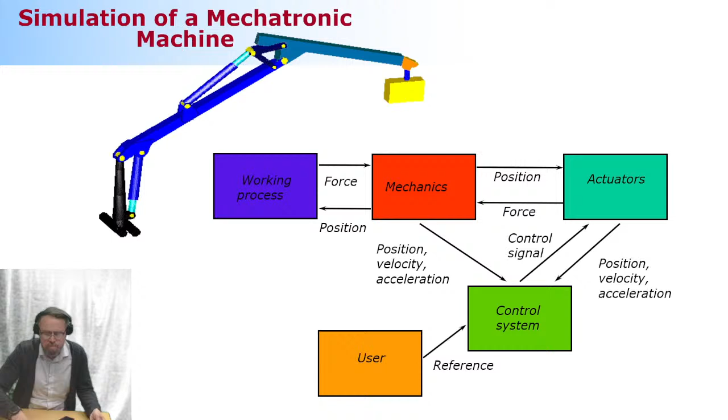Okay, so you have a phone with you. Yeah, so can you take a look how did it look? Yeah, I'm alive. That's how it looks. Yeah, it's okay. I think that it is okay. So the chroma key is not perfect, but it's not very bad either.

I think that it is. Background is like... can you hear me? Yeah. Is it okay? Still not okay, you don't hear me. Oh, okay, you do hear me now. So it's okay, it comes with a major delay. So I think that it is okay.

Okay, hey thank you, I'll be here. You're gonna be here? Yeah. Okay, so can you please use your computers to see if there's any comments from online participants? Yeah, yeah, and I'll let you know. All right, very good, very good.

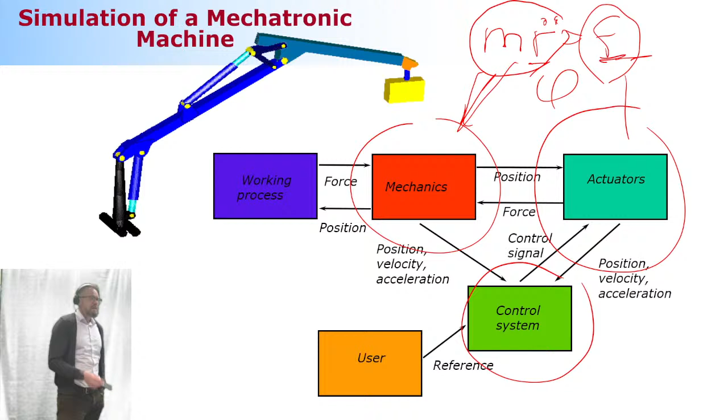And of course, it's not just these two components, but the control scheme often makes a major difference. The user can make a major difference. The control scheme is something that we don't touch much in this course. We are going to touch this one, which is the user. And the user can be accounted for when you're synchronizing the solution to real time, which is called real-time simulation. It's pretty much what we have learned so far, but the solution is synchronized to actual time. This allows you to take the user into account.

And there's something we are not going to touch in this course. It's going to be the working process or the environment. This will be left for the course that is the best course of this university.

So if you make a list of the best courses this university can offer, the list is as follows. First comes the simulation laboratory course, the one that I'm responsible for. Then comes nothing. Then there is a big gap, and slowly other courses. So it's absolutely in its own league. This course is getting started in January. Think about participating.

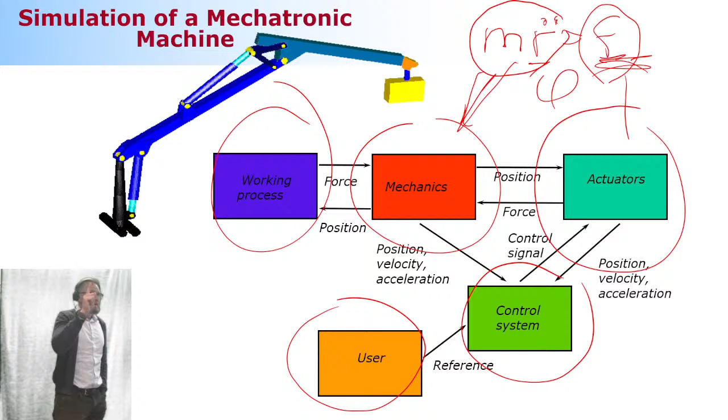All right. Anyway, contact modeling and others are going to be touched in the course that is getting started in January. But still, we are in the middle of the task. We need to start looking at this guy, and that's what the rest of the course is about. But something that is extremely important for you to understand is this.

Grading. Remember, some of you may think that I'm off the hook. I can finally breathe, I can relax because I scored well on this and this. I learned that some of you scored 5 out of 5 on the midterm exam, which is fantastic. It's really great. It's hard for me to even believe that somebody can score 5 out of 5, because the exam is really, really difficult. And now you might think, okay, I figured out everything a while ago, I can take it easy.

I don't need to work anymore. And that's where you are wrong. Because look, the grading is composed of 3 major components. Written exam, which you have not completed. You have not, because you made a first midterm exam. There's another midterm exam to come. So you need to do them both. And that's when you can say, finally, 35% of my course is done.

35%. Not much. You need to look at this weekly homework. Weekly homework is something that is continuing the second period, but only for, what is it? Is it 2 or 3 more weeks? And then we're done. Then we are not doing this weekly homework anymore. And then there's a simulation work that will be given to you. Was it this? No, it's going to be next week, if I remember correctly.

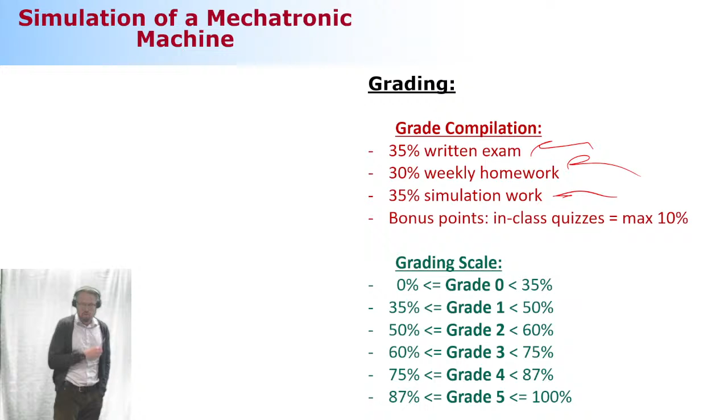Okay. All right. Any comments, questions about the midterm exam, by the way? Was it simple? Was it something that you expected to see? Was it too difficult? Nice. Nice to be back. Nice to have this, again, this nice friendly environment. This was exactly what I was missing. So the exam was lovely. So did you feel that it was difficult or it was okay? Okay. I like the way that you had two chances. Yeah, that I think is a nice thing.

The problem I need to admit is this, that it's still black and white. It's correct or not correct. That's not good. It's supposed to be like the weekly assignments, where if you're not able to answer correctly the first time, you will get a hint and your points will go down, but you're still not going all the way down to zero. Because I feel that's a little bit excessive, that if you're not able to answer correctly, then you get nothing. The one thing that makes your life a bit easier is that you have a lot of questions. So even if you missed one, you still have many to go. So, all right. Anyways, embedded techniques.

So let's discuss one more thing about mechanical modeling. And you guys, I can tell from your face, like, what? You promised no more mechanical modeling. I did, but sometimes you cannot trust me, because I have my desires to continue my stuff, because multi-body, you know how much I love that. And I'm thinking that I'm going to change my middle name to be multi-body. So it's Aki Multi-Body Mikkola. That would be more describing me than anything else. So one more effort about multi-body, and then we're going to move on to hydraulics, which is not my middle name, but I still like the modeling of hydraulic components.

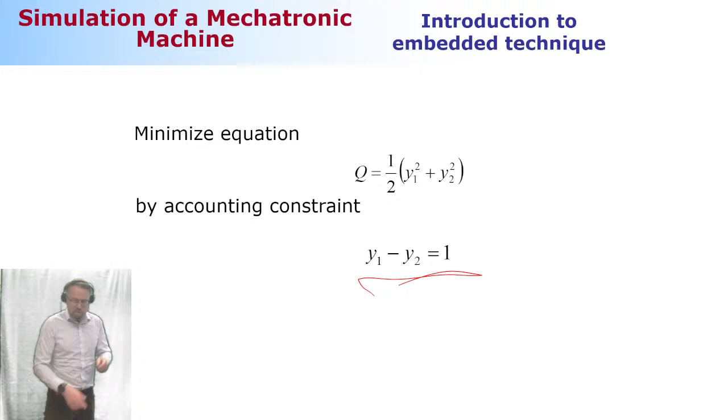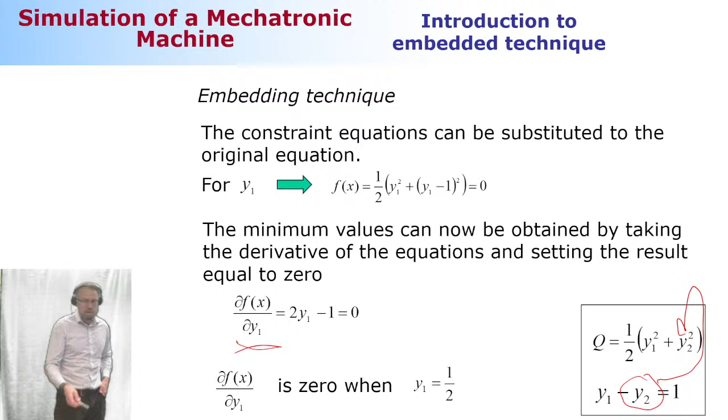Remember, 4 weeks back, we solved the problem by using substitution technique. So we substitute the constraints to original function. And it went like this. So first, you're solving your constraints. From your constraint, you're solving y2. Once you're done with that, you substitute y2 to your original equation. And then you differentiate the equation with respect to the only variable you have, which of course, in this case, is y1. You set this to be equal to 0, and you're able to solve your first variable, which is going to be y1. So it's simple like this.

You redo the thing, but this time you're solving the y1, and you substitute it, you substituted that here, and then you can solve the y2 by differentiating everything with respect to the variable, the only one you have in your system. And then you're able to solve another equation.

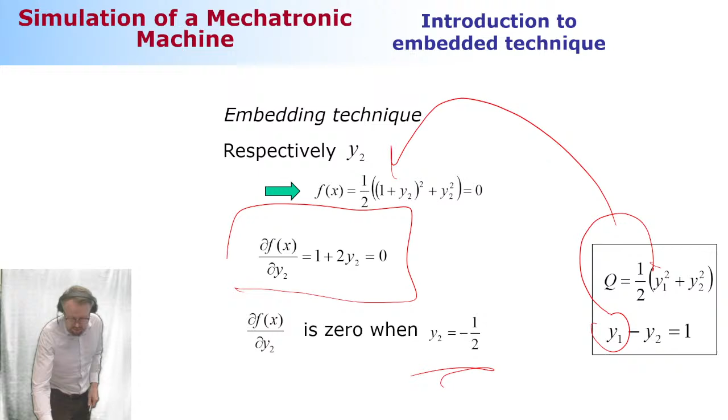How you do the same, but in mechanics, it goes like this. We take ourselves back to the equation of motion, and we take ourselves back to where we said this virtual work. This was the equation we end up to be. Remember, so we say that virtual displacement of all the coordinates multiplied by generalized inertia forces minus generalized externally applied forces is something.

Unclear what it is. And I said that the concept of virtual work is often misused because in general case, as this virtual displacement goes in all possible directions, it is not equal to zero because the constraints are not obeyed. You're going against the constraint. That's clear because if you have, let's say, a pendulum like this, you're moving the pendulum to x direction, it's going to be like this. So you're breaking your system, and that's why the constraints are actually working.

The only way to set this to be equal to zero is to set this virtual displacement, which is this guy, such the way that it is kinematically possible, kinematically admissible. Okay. Now, pendulum is clear. Kinematically admissible is this. That makes sense.

What if you have more complicated mechanisms? A 4-bar mechanism, it is not so simple to define what is a motion that all the constraints are fulfilled. Crankshaft mechanism, seemingly simple mechanism, but it's not so simple to say, okay, what kind of displacement exactly is the displacement that is kinematically possible, displacement that fulfills the constraints. We all understand how they look in real life, but how is it you can express that mathematically? That's a challenge. And there is a way to make it happen.

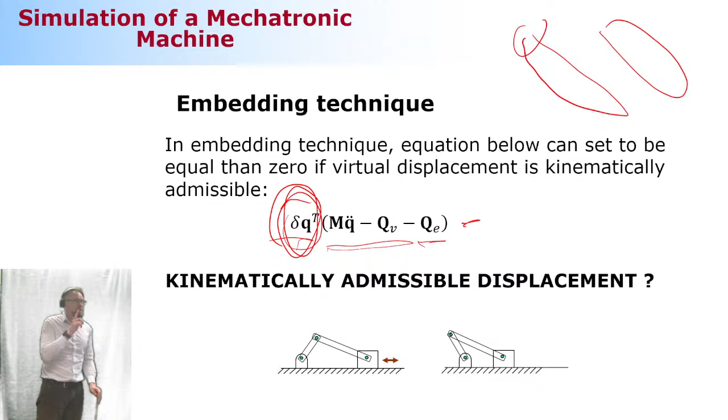And the way you can make it happen is that you can categorize your coordinates to 2 different categories. And these categories are dependent coordinates and independent coordinates. How you do that? Actually, you can do this almost any way you want. There's going to be certain limitations, which I'm going to explain to you momentarily. But basically, theoretically, you can do this categorization as you want. All that matters here is that you need to make sure that the number of independent coordinates must be equal to the number of degrees of freedom. So that's the only thing that matters.

The rest are going to be dependent. Why is it like that? It's going to be like that because if I have a 1 degree of freedom system and I'm moving this 1 degree of freedom, I can select any coordinate I want, but the rest of the coordinates are no longer able to move as they want, but they have to move according to constraints. So this is where that is coming from.

Yes, sir. Yes, because I was looking at your faces and I see that some of you are mentally screaming like, oh my God, I will not survive anymore, this is too much. First promise that it's going to be sun shining and everything, long daylight and beach weather like this. You can look outside, there's nothing but like that.

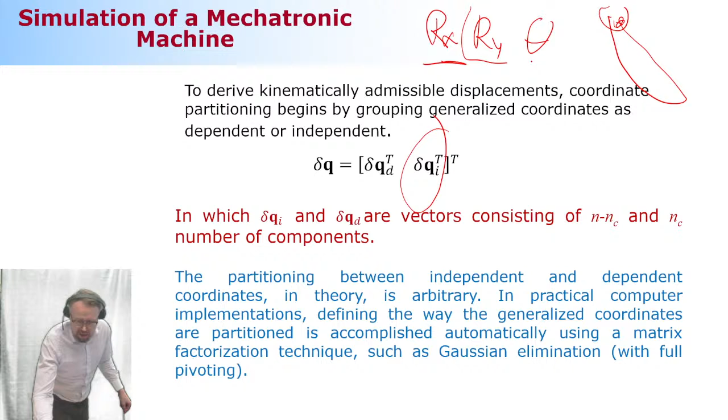Whatever you want. If you want, you can select this one to be the one that is freely movable. But the rest are no longer free to move as they want, but they have to move according to the revolute joint here. Or if you say, actually, I'm not happy about that selection, I want angle theta to be the independent one, fine. But the rest need to be solved by using constraints. And when you do so, then you can say that the displacement is kinematically possible, kinematically admissible.

Then the motion is for sure something that the system can do, because all the dependent coordinates are solved using constraints. That's what we're going to do. And this is the method that is called the embedding technique, where the constraints are embedded inside of the equation of motion. I said that dependent coordinates need to be solved using constraints. Where are the constraints? They are not here. So what was the representation of constraints? Jacobian matrix. That is the one that is telling the constraints.

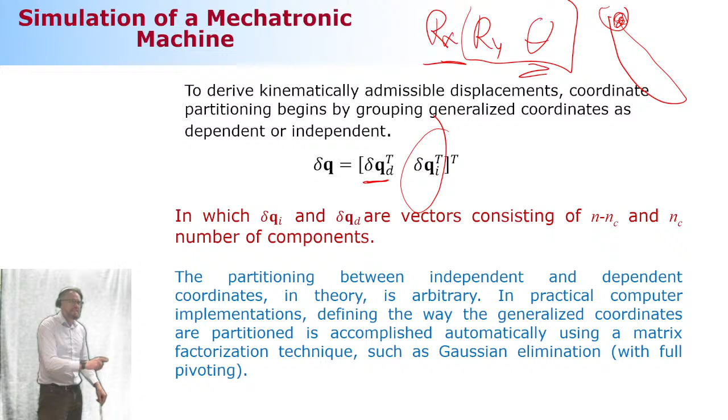So, okay, what about we do this? Oh, there's an in-class quiz. Let me get back to this in-class quiz momentarily, because I was about to explain where the constraints are. The constraints are the Jacobian matrix. So what we need to do here is break the Jacobian matrix in a way that there is a part related to the dependent part and an independent part. This division, theoretically, you can do as you want, but theoretically only. In real life, this division will be based on Gaussian elimination with full pivoting. This is how the selection is made automatically for you.

Okay, if you apply this coordinate partitioning to the Jacobian matrix, and you have a Jacobian matrix, like in the case of the pendulum, consisting of 2 rows and 3 columns, now you can select 2 of these columns to be associated with the dependent ones. If you select these 2, it's going to be a 2 by 2 matrix. And what is left is going to be a vector with 2 components. And because the one related to the dependent part is probably going to be invertible, now you have a relation between the independent coordinates and all the coordinates. And this is what makes it possible to express the motion in such a way that the constraints are not violated.

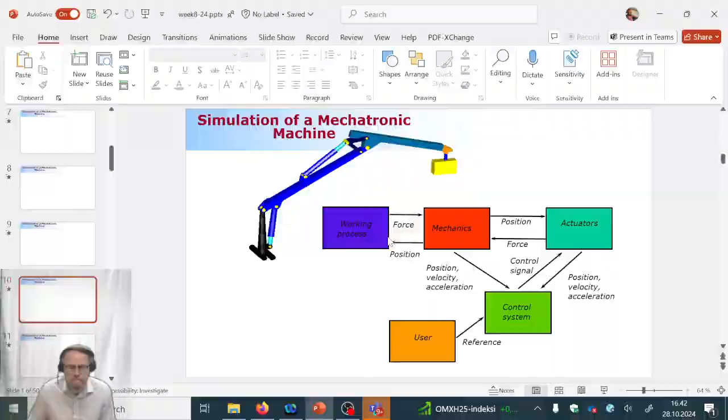This one. Oh, you guys don't see this. Or should I think maybe I should leave this for a little while and get back to this after a certain time, because what makes me feel very, very happy is to get 100 and something answers. So right now we're below 100.

And why is this important? Because there's only one clear indication of how you do in this class. And that clear indication: if you follow the lectures, you're going to do fine. And if not, you will not survive.

You will not. Okay, we got 100, but I need more than 100. Okay, 101. Okay, that's okay. I feel semi-happy, not fully happy, because remember what was it before the midterm exam? It was 128, roughly that much. 104 answers. Okay, let me leave this up for a while and revisit that momentarily. Okay?

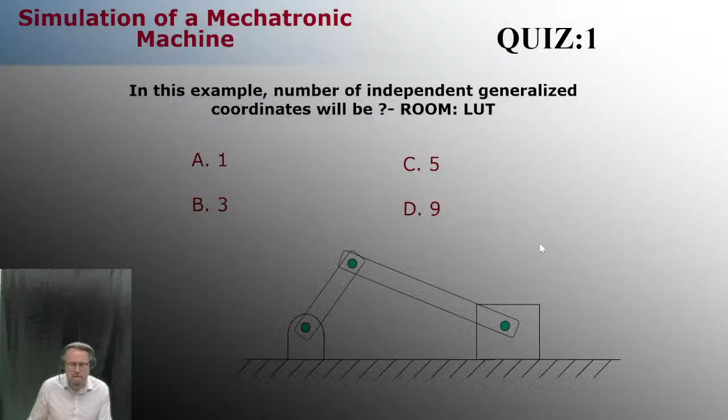Here, we continue this story. What follows is that I'm going to speed up a little bit, because I would like you to just understand this concept of coordinate partitioning. The rest is mechanical, and you shouldn't get confused. The coordinate partitioning is what I just said, that you're dividing your coordinates into dependent and independent. You can do the selection almost as you want. The only thing that matters is that the number of dependent coordinates must be equal to the number of constraints, and the number of independent coordinates needs to be equal to the number of degrees of freedom.

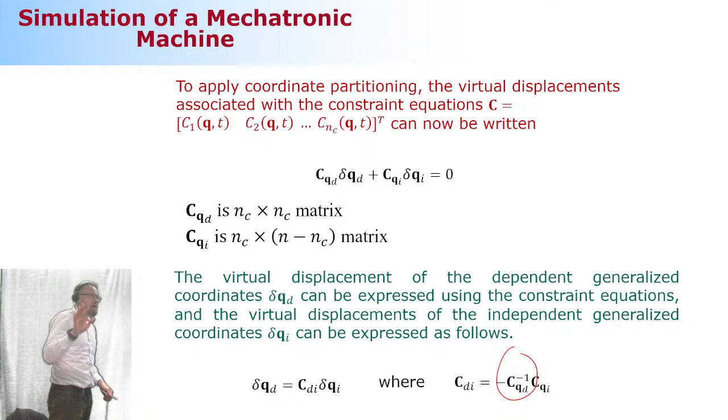Almost as you want. There's only one limitation, because you need to invert the dependent part. So it needs to be a positive definite part, and to guarantee that, you need to use Gaussian elimination with full pivoting. But don't worry about that. You don't need to think about anything that complicated. Right now, it's enough to know that you do this division, and that's all you need to do.

All right, now let's continue the story. This virtual displacement of all the generalized coordinates can be expressed by independent coordinates, which is the number of degrees of freedom. Can you now see the beauty? When we do this substitution, something magical happens: this part of the equation of motion can be set equal to 0. Why? Because now the virtual displacement is kinematically possible. We are not violating the constraint. And this works no matter how complicated your system is.

Why? Because this relation is coming from the Jacobian, and the Jacobian is coming from the constraints. So we are obeying the constraint. Beautiful. So now we can get differential equations based on the number of degrees of freedom. How many differential equations? Exactly the number of degrees of freedom. Remember, a little while ago, I think we looked at the 4-bar mechanism.

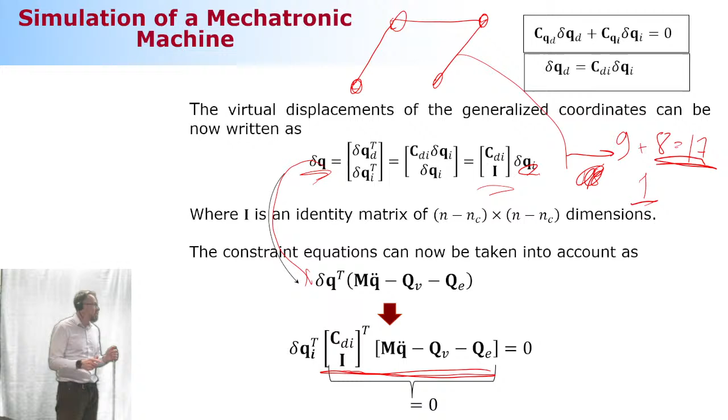So this is the story. Now we have these two methods: one based on minimum number of differential equations, embedded equations, where we substitute the constraint inside, or augmented formulation where we even take the reaction forces into account. The problem, of course, is that reaction forces are not automatically solved, but you can solve them as a post-processing technique if that's what you're interested in.

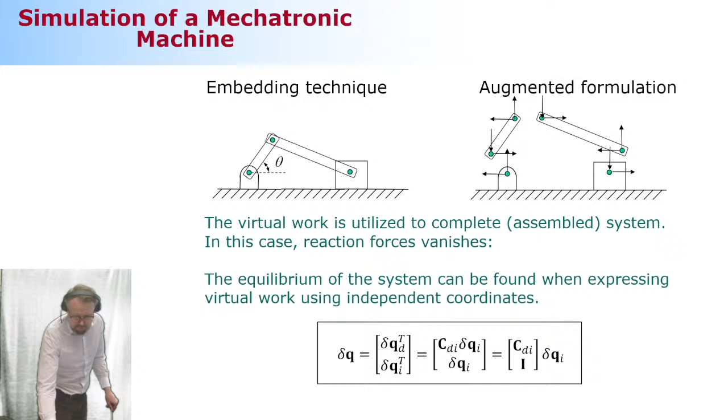All right, so we were here. This was a trick that we did. Let's practice this a little bit and let's summarize it.

So now the concept of virtual work goes like this: you have force multiplied by displacement, virtual displacement. Then you express this with the help of the variables you're dealing with, generalized coordinates. You can express this with a mapping matrix. And when you're using coordinate partitioning in your constraints, you can express your virtual displacement such that it is kinematically admissible.

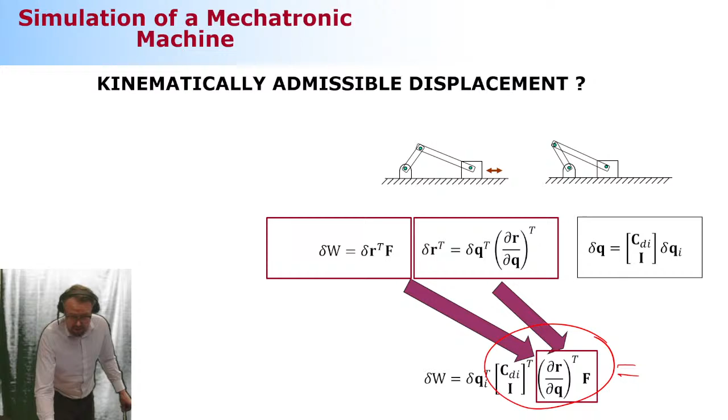Now, when you do all these substitutions, you can finally set this part of the statics to be equal to 0. This is a static example because inertial forces are not accounted for here. And here's an example for you. So let's look at this example, wrap up the case, and move on to hydraulics.

All right, so I have here the mechanism that we have studied before. This is the simple 1 degree of freedom system where there is a primitive joint located here. This point can slide along the global y-axis, and this motion is okay. And this motion can slide along the global x-axis direction. So those are the two constraints, two primitive joints. One moving body, so it's going to be a total of 3 generalized coordinates.

Okay, 3 generalized coordinates are the ones denoted here. Now I'm making an obvious choice here: I'm selecting the angle theta to be my independent coordinate. But if you're not happy with this selection, you can select something else. This selection is very clever because once you compute your Jacobian, it looks like this.

Now what you need to do is break this Jacobian into 2 corresponding parts. The first part is associated with dependent coordinates. The rest is independent. This guy, which is the identity matrix, is going to be the one related to dependent coordinates. This is a good choice because later I need to invert it, and inverting the identity matrix is a super pleasant thing to do. So it's going to be identity matrix, so that's what it is.

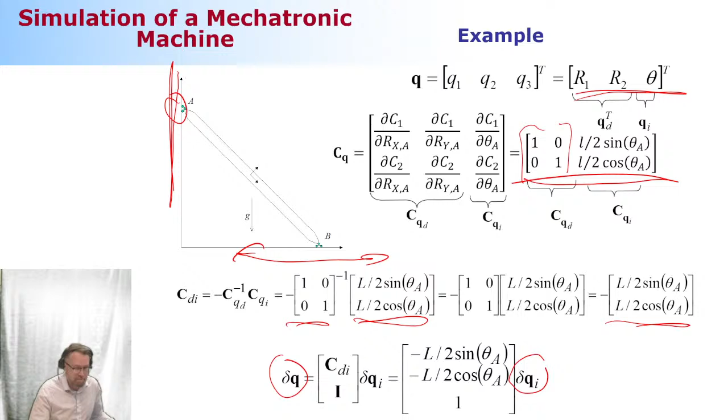Okay, now the rest is this one. And now you can find this relation between all the coordinates and the independent coordinates. Okay, so that's step number 1.

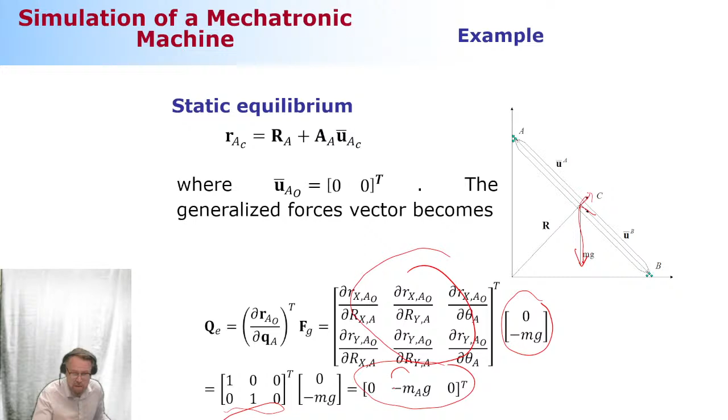Then, where the force is applying - now I have the gravity force only applying in the system. It's applying here where this center of the body reference coordinate system is located. So the mapping matrix that maps the force from global to generalized coordinates is going to be very, very simple. Generalized external applied forces consist of 3 components. The only non-zero component is the one pointing in the global minus y direction. And when I'm using this chain here, this is how I can express my equilibrium.

When I do so, this is my force, this is my mapping. When I multiply them together, as shown here, I'm going to get the equilibrium. An equilibrium - this is where I can solve the angle. And the angle shows me if it's pointing like this, this is where the static equilibrium can be found. Simple demonstration of what the embedding technique can do for you.

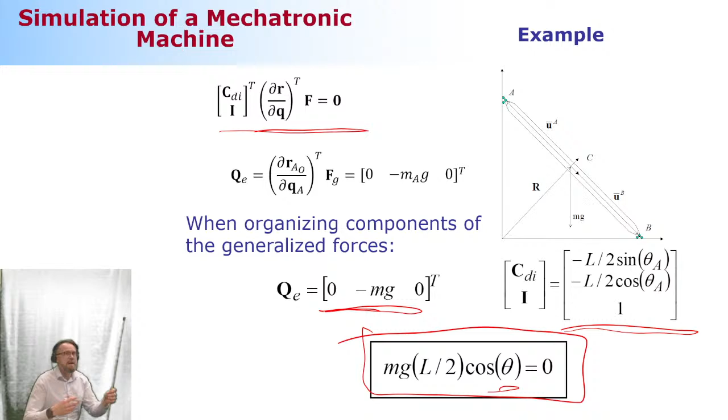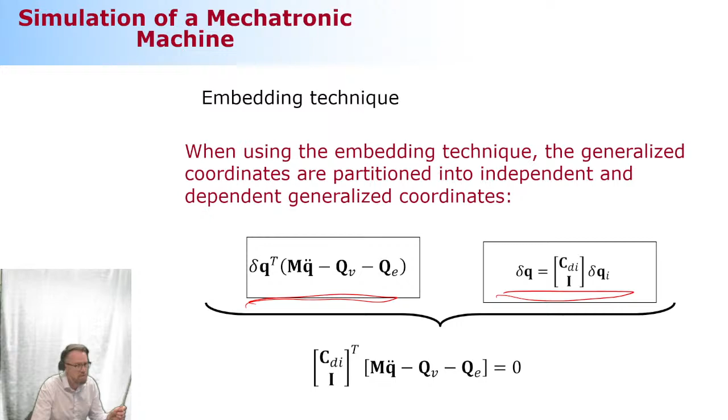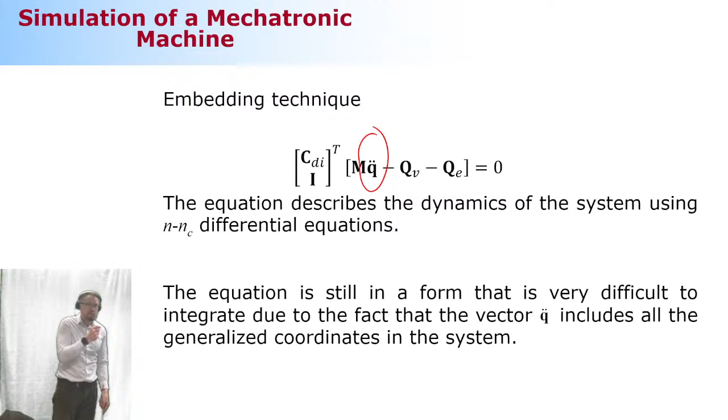And now we're going to leave that. Embedding technique - this is where we started. This was the one based on coordinate partitioning. And one more problem: in a dynamic case, we still have one annoying problem. This guy, because that includes all the coordinates, and we don't like it because we would like to express the acceleration too, based on independent coordinates. So that too is something where we need to use coordinate partitioning finally, and then we're able to express the equation of motion in a proper way.

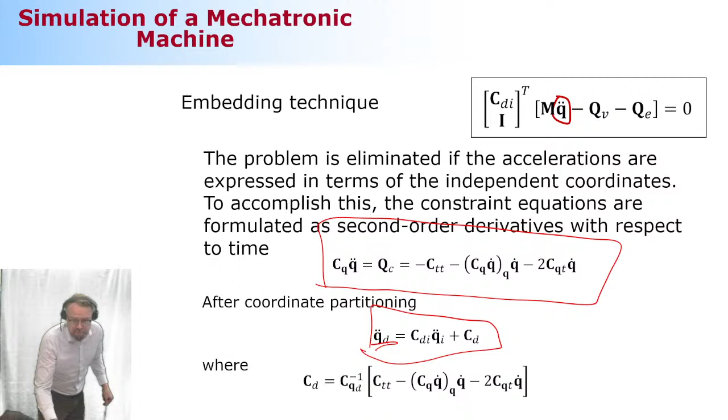So when you're expressing this acceleration, and using coordinate partitioning, in this particular case, the one related to dependent acceleration is going to be expressed like this, and the independent is like identity. So now, using this relation - sorry that I'm going fast, but this is mechanical, so you guys don't need to worry about the mathematical details - when I use this substitution, the equation of motion is here. That's how it looks.

Now what I'm going to do is this: we're going to take a look at the in-class quiz. So we will have another in-class quiz. And then we're going to look at one simple example about the embedding technique, but we're going to go through that fast, because this is not the core material anymore. And then comes the hydraulics. How does that sound, like a plan?

What did you guys make during the exam week? I feel some certain level of unhappiness. What went wrong? Was the exam too hard, or what? It's just that life is rough. Is that the explanation? That's good, because remember, everything that comes without pain has no value. This course is definitely something you feel the pain for, physical pain. So it comes with the game.

Can you feel that your brain is getting bigger all the time? Of course it hurts, because your brain is getting bigger, so it's not easy. It needs to hurt, physical pain. But it's going to be something you're happy about afterward. When you look back, you can make one of these survival t-shirts: Survive Simulation of Mechatronic Machine class. Okay, let me take myself to the in-class quiz.

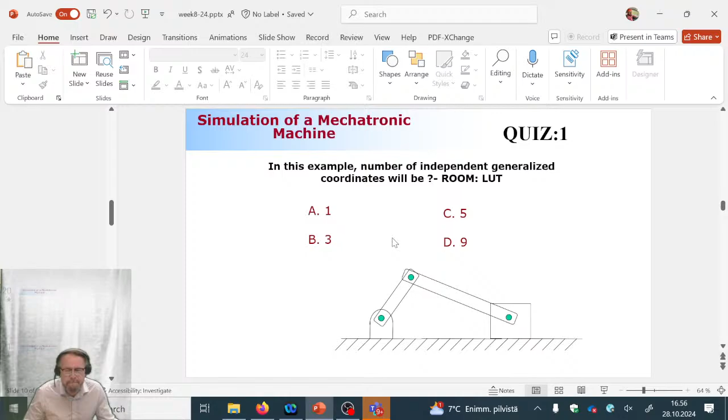Oh my God, I'm smiling. I'm smiling, and I can tell you why. Not because of the success rate, no, that's not the reason. But the reason for smiling is this: number of participants is 127. Fantastic.

What is wrong with this guy? Why does it keep bouncing? Now it doesn't really matter what the success rate is, even if it's 0, I'm going to be happy. Rest of the week, I'm going to be happy. But if it's higher than that, that would be even better. But that doesn't really matter.

Results, what is the success rate? 90... 72, no, 72. Ooh, 95. Oh my God, I'm really playing with fire. This is a high-risk game. But we're almost done with this high-risk business, because there's going to be one more simple in-class quiz, and the rest is so difficult that you guys have no way to answer correctly. No way.

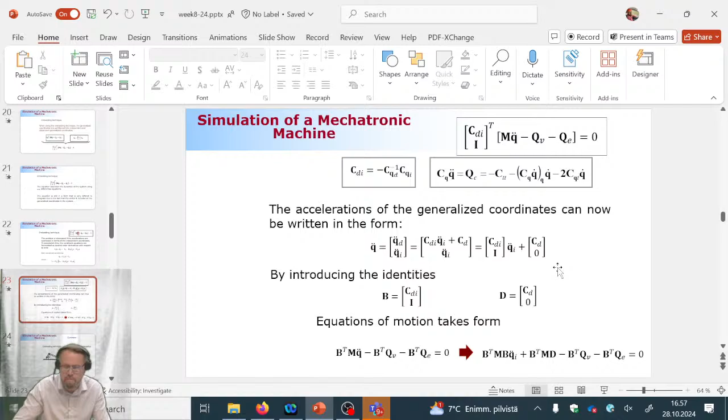Okay, let me take myself back. Not this one, but... okay, so the same example.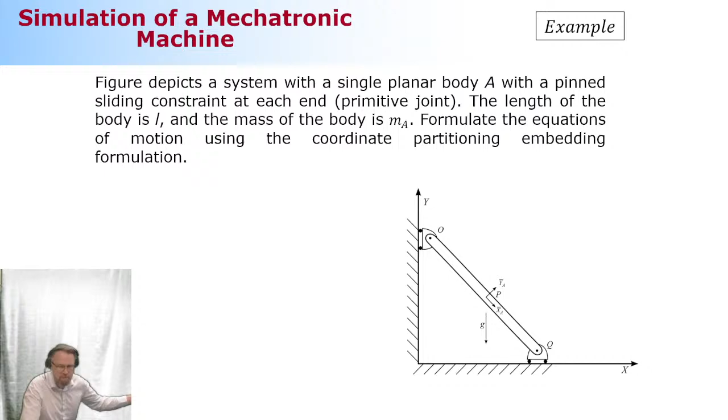The one we looked at for static equilibrium, I'm going to solve this using the embedded technique, the substitution technique. We have another set of steps to take, and then we're going to get the equation of motion automatically. But first is this: in this example, the number of unknowns.

Number of unknowns, number of unknowns. Most of the class is voting for 5. Think about it: the number of unknowns is going to be based on the number of what? Is it going to be the number of generalized coordinates? Is it the number of constraint equations? Is it the number of generalized coordinates plus constraint equations? Is it based on the number of degrees of freedom? Is it going to be like this?

Which one is it? It will not help you, definitely not help you. But what do you guys think? Okay, the class is saying here. Most of you are saying that it's a number of... like you're saying it's this one.

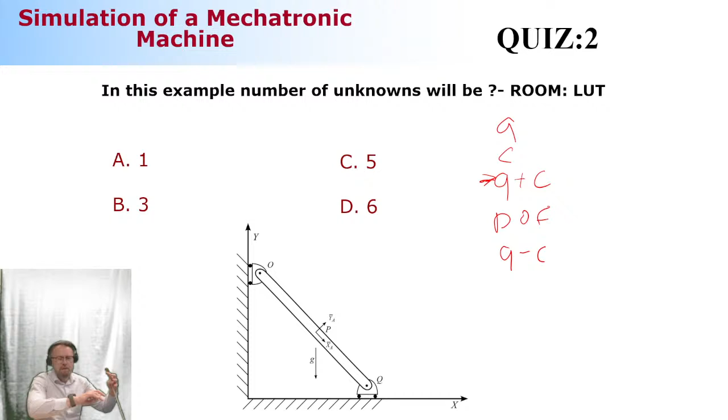Now, based on your face, you seem to have full confidence that it's absolutely correct. Okay, we're going to revisit this right after I explain this example. Here's my proposal to you: let's look at the example, then we're going to go back to the in-class quiz. And then what? Break, if you can still find your way out of this lecture room. And then we're going to come back and get started with the hydraulics.

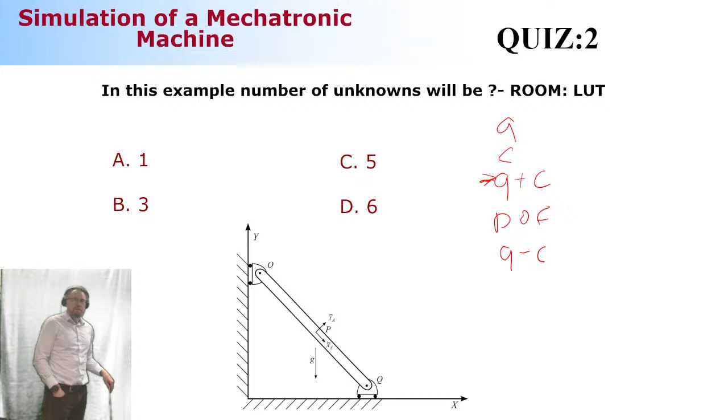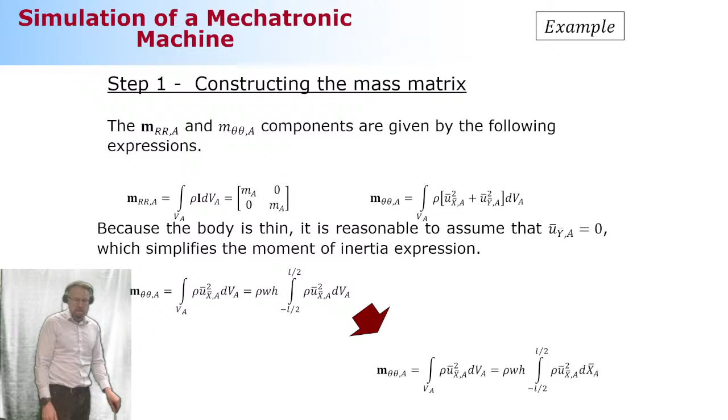Good deal. All right, so step number 1, mass matrix. No difference. We still need to compose the same components that we did when we used the method based on Lagrange multipliers. The difference is in the assembly process, because the assembly process will be different in this case. So there's nothing new to learn from this first step. The mass matrix will be a 3 by 3 diagonal matrix, because the body reference coordinate system is located at the center of the mass.

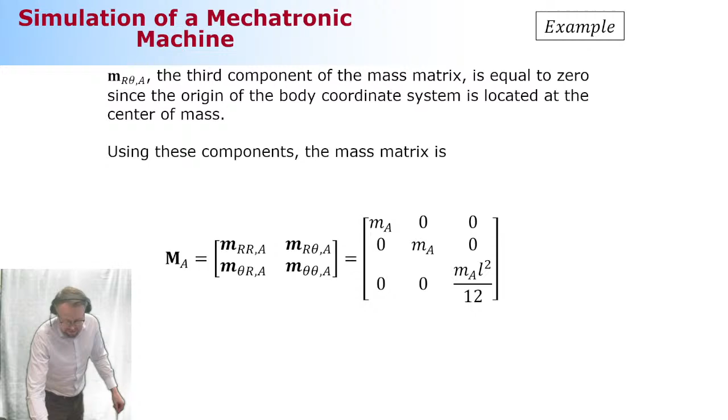We learned this already when we were a little bit younger than today. Then the generalized external applied force is no different in this regard either, so it's all the same business. We learned this in the case of static example 2.

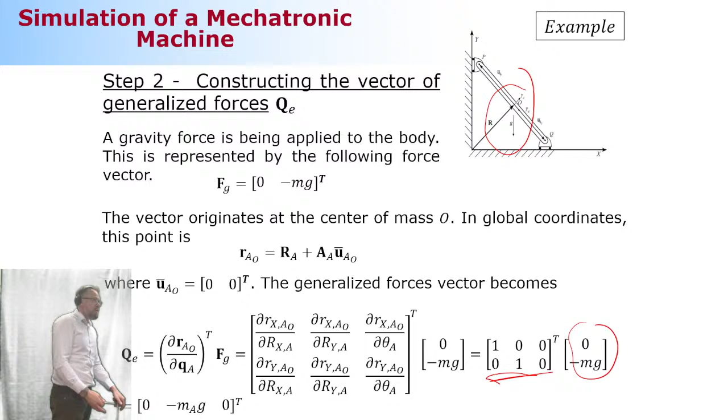This is the mapping matrix, which isn't even needed because the force is applying at the center of the body reference coordinate system. The force vector consists of 2 components: 0 and minus mass multiplied by gravity constant. The quadratic velocity vector is going to equal 0, because we learned that's the case when the body reference coordinate system is located at the center of mass.

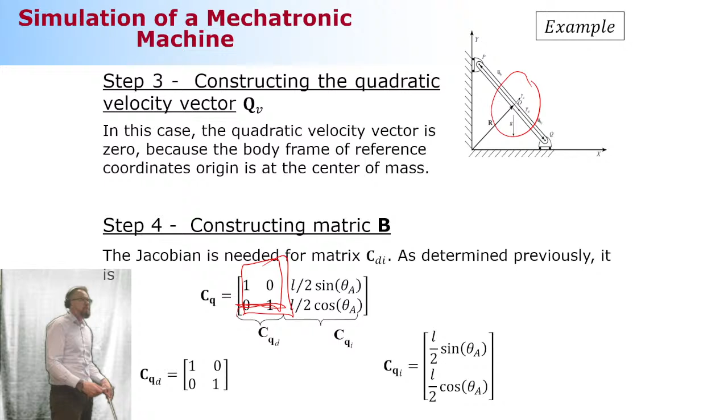Here comes the first complicated component, because now we need to use coordinate partitioning. I'm selecting the identity part of my Jacobian to be the dependent part, and the rest is going to be independent. When expressing B, this identity part needs to be inverted, and that's going to be my B matrix.

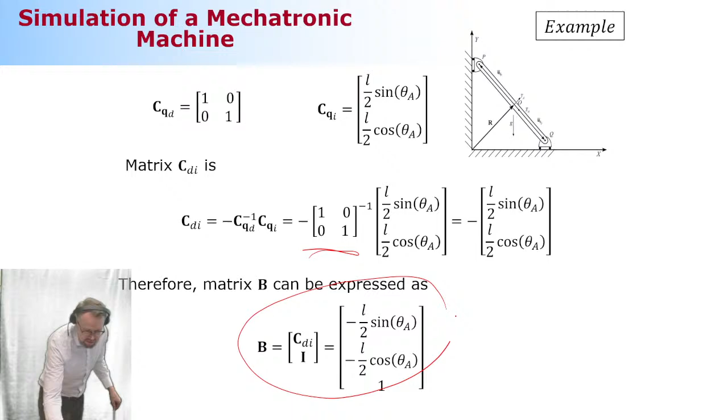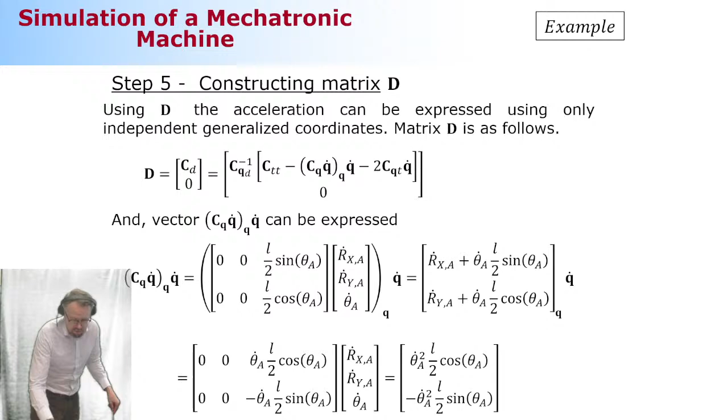My D matrix is the next step. I need to use coordinate partitioning at the acceleration level, and yes, this is a big pain. This is not going to be pleasant to do, but thank God we have symbolic math tools so they will do the trick for us. Once you do this, finally this is the D matrix. I'm not even looking at the details, but the D matrix looks like this.

In the final assembly process here, I have not made the mathematics, but look at the number of unknowns—it is equal to the number of degrees of freedom, which is 1.

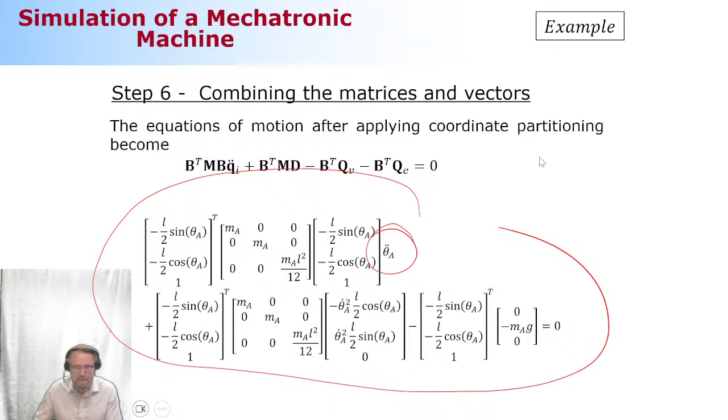Okay, let me take myself back. I need to rush myself, otherwise I cannot say the correct answer. Oh, you cannot. Oh yeah, yeah, of course not. Okay, but again, I cannot say what is the correct number of unknowns. But in this example, the number of unknowns will be...

I'm not going to say that, because as you know, in the class we have roughly 20 to 40 students. The majority of the students are participating online, and I don't want to help them too much.

By the way, guys, why are you coming here? Why don't you follow the lecture online? Online is artificial. I know the big problem with online is that you get distracted so easily—let me check my email, let me check my YouTube, let me check my Discovery Channel, let me check this and that. All of a sudden you recognize, oh, it's all gone, the lecture is gone, and I did not even notice it started. This happens so easily. Here you now have no other choice than to listen to me, and I make all the fun out of that.

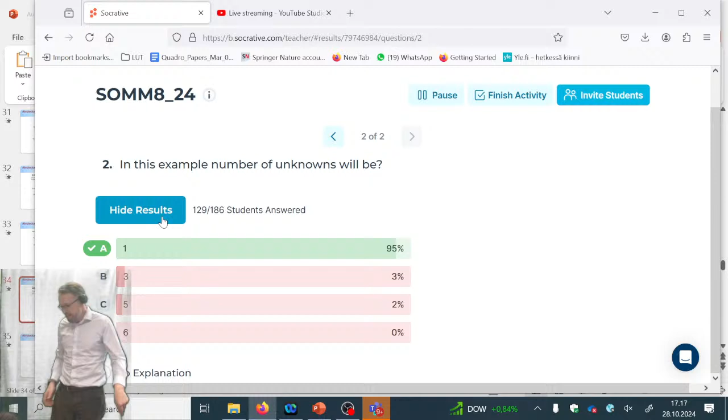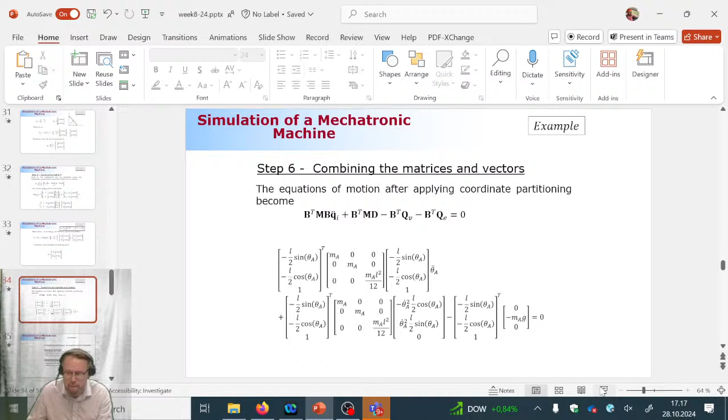Let me take myself to hydraulics. I need to take this. Oh, no, not this. Because there's a certain sequence that I need to follow, otherwise it's not displaying well. Okay, now it's displaying well.

Okay, embedded technique versus augmented formulation. Embedded technique: number of equations are based on coordinate partitioning. That's the trick we did. And equations of motion do not include the reaction forces, and very few equations are needed. Large number of equations of motion are relatively simple to deal with. Reaction forces, look at that, are included in the equation of motion. Okay, mechanical modeling. We need to revisit this as soon as I give you this simulation assignment.

But you see something important here. This is all about thinking, and not about doing. There's one famous student that got the degree a while ago. When he was modeling, the clicking frequency of his mouse was more than 100 hertz. So he was really clicking like hell, but success rate was very, very low. So that's a good example of too much doing, too little thinking. So make sure you're doing the opposite. Think more than do. But we need to revisit this list a little later.

Okay. So how was it last time, when we started the lecture, there was something with the display? Okay, I think it is okay. Now I made the incorrect sequence again. Okay, how is it looking? Is it getting back? We can see it. So you can see it now.

Okay, so in heavy machinery, the typical way to use hydraulics is that there is a diesel engine connected to a pump. The pump is producing the energy for the hydraulic cylinders, and this is the way you do the actions in heavy mobile machinery. Now there is a heavy trend, which is electrifying: try to use electric drives more. And electric drives are a good idea. The problem is that the power density, I mean physical size of the actuator versus the force it can produce, is not as good as in hydraulics. In hydraulics the power density is superior; with small dimensions you can produce a lot of force,

which makes it very, very good in heavy machinery. Now every now and then there have been different ideas, like how to take actuators to another level or how to create another type of actuator. A good example that was a little bit in fashion a while ago was water hydraulics. So instead of using oil, let's use water, because then it doesn't really matter if there's leakage. If the water comes out, fine, you can drink it if nothing else. So it's not going to be anything too dangerous, environmentally very friendly, green even. The problem, of course, is this: two big problems.

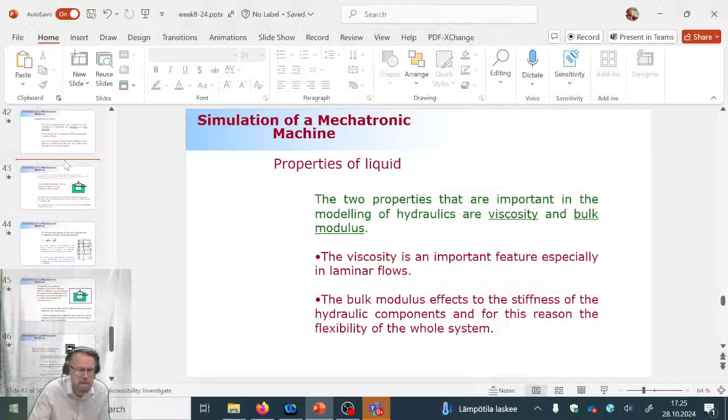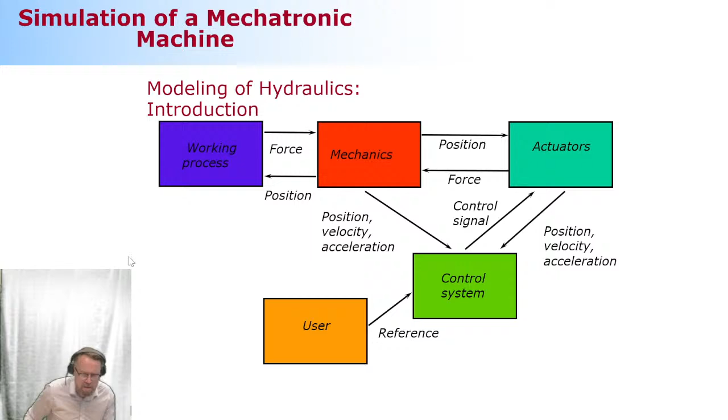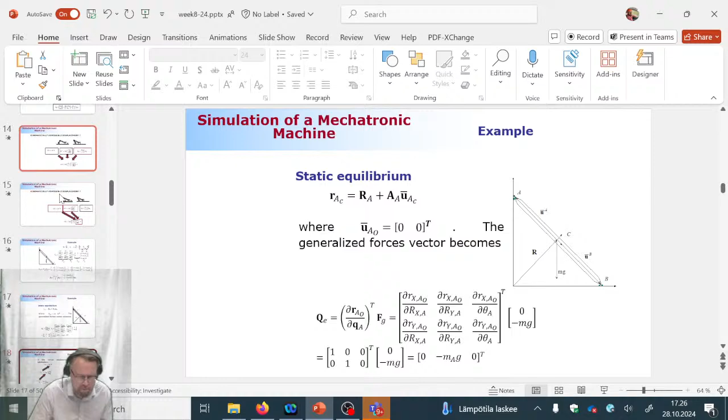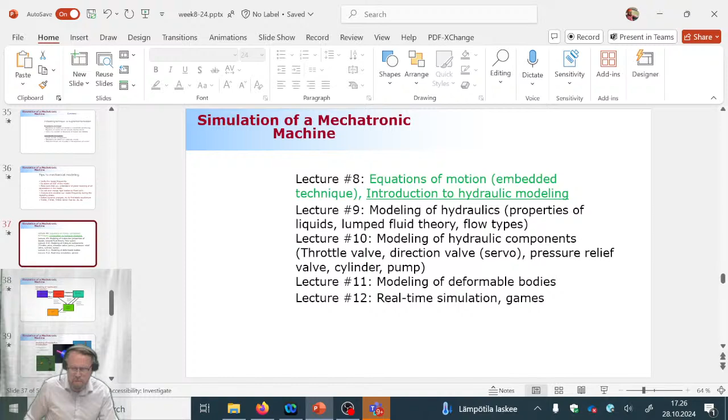All right, so, actuators. This guy is stuck. So what is up with this? This is completely dead. Am I still streaming? Even the mouse is no longer working. I need to take myself back to where I was. No, I don't get this thing. How come this is not willing to collaborate with me today? Nothing. It keeps taking me to this weird place. Okay, now my keyboard is working. I was here. If I put this in presentation mode, then you can see it. Yep, now it works.

Okay, a few examples where hydraulics is being used. The animations are not displaying well, but of course, different kinds of crane structures. This is a typical example where you can make use of the high power density of hydraulics. You see that the size of the actuators is not huge, so they are pretty lightweight, which makes them optimal for different kinds of crane structures. This is a pile driver. Again, the animations are not working well, but finally it's coming. The controlling of this big boom is made by hydraulics.

This is a deflection compensated roll, which is used in the paper making process. This is a type of roll that I'm specialized in. Seriously, it is. It works in a way that there is a shaft that is standing still, and then there's a shell that is rotating, and between the shaft and the shell there are hydrostatic bearings, very specialized because they can introduce forces to compensate the deflection. That's where the name deflection compensated roll is coming from. It's typically used in paper making processes, in the post processing part, and even in part of the machine itself.

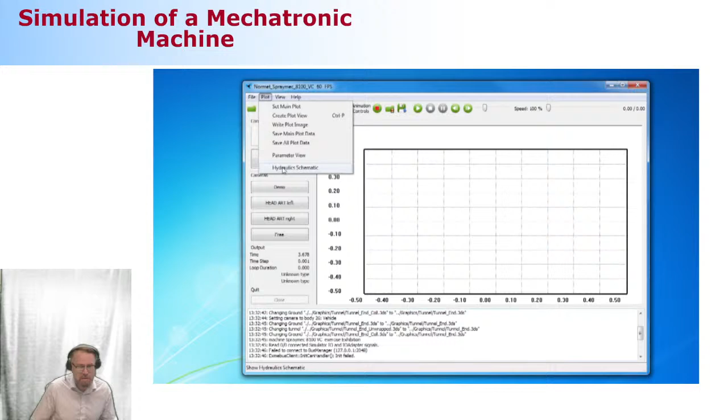All right, and how did I specialize in that? Because I was a product development engineer more than 25 years ago in a company called Valmet, making these paper making machines. Okay, here is an example of hydraulic modeling, which I'm not going to use, because this kind of hydraulic modeling is based on these kinds of icons.

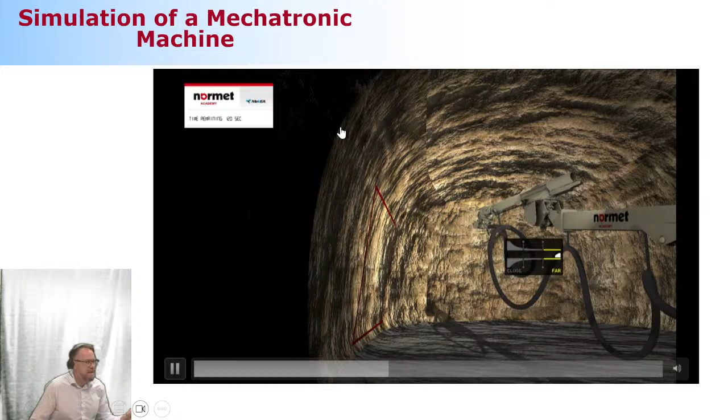You just put these icons in your screen, and then you go. We are not going to use this, but instead, we're going to enjoy the life more. And the way we're going to enjoy the life more is that we're going to create the equations that are behind these icons. This is going to be the way we're going to model the hydraulics. And yes, you're right. It's going to be a big pain because one single mistake in one of your equations means it's nowhere near to work properly.

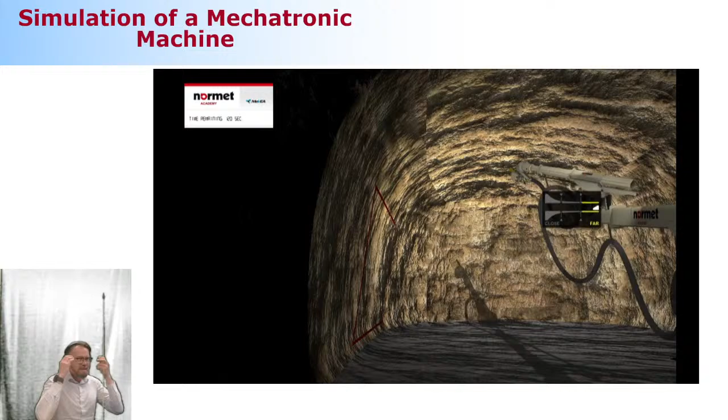But educationally, best, because can you feel this? Can you feel this noise? It's coming when your brains are getting bigger all the time. They definitely will do so when you're going to use this kind of manual modeling procedure. But manual modeling procedure is not used in real life.

In real life, when you're making models, you're using one of these tools, and there are plenty of different kinds of tools. You just place in the icons, you're selecting proper parameters, you're connecting the components together, you're good to go. This is a typical modeling procedure. And this kind of modeling procedure is available in Mevea software if you decided to use Mevea software, and is going to be available in many other multi-body based software, because obviously if you're guessing the forces, you're guessing too much. So it's not going to be physics based any longer.

All right, let's start modeling of hydraulics. So first let's take a look at the fluid itself. In a fluid, we have two very important properties. And only one out of the two is important, another one less important. Okay, so the properties we need to take care of when we are modeling the hydraulic fluid, getting started from the fluid itself, are viscosity and the bulk modulus.

The one that is actually important for us is the bulk modulus, because the bulk modulus is defining the flexibility of hydraulics. Often, flexibility of hydraulics is equally important, even sometimes more important than the flexibility of mechanical components. And that's simply because the fluid is compressible. And because the fluid is compressible, then of course, cylinders too, if you put a lot of force on them, will act like a spring.

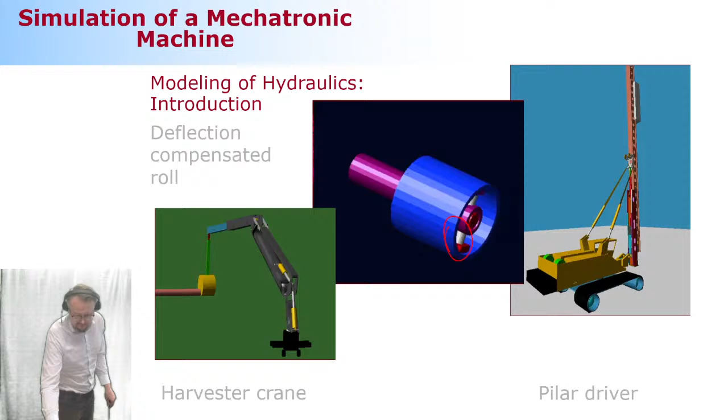In deflection compensated rolls, these loading shoes, the ones that are located here, the fluid goes through these shoes. And because this is a very long drilling, this flow type is a laminar flow. But it's not very common. This is something that you see in engines, perhaps in certain locations, but in heavy machinery like actuators, you don't see that very often. Okay, but two properties, and today we're going to look at both of them.

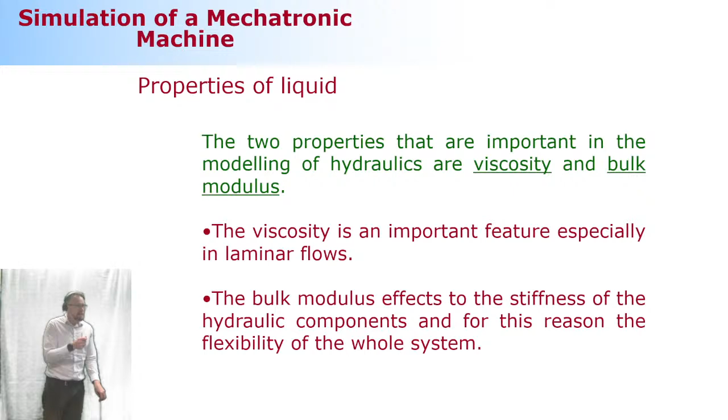We're going to get started from the bulk modulus. Remember, it's like elastic modulus in the strength of materials. So something that defines how flexible your hydraulics is. Okay, and the viscosity is another thing. But let's get started from the bulk modulus. Definition of bulk modulus is pretty simple.

It's something that we can find out when we are having a container that is stiff, let's say an undeformable container, which you cannot find in real life because everything is deformable in real life. But let's just make an imaginary container that is made out of hyper composite something which is not capable to deform.

Okay, and this is a container here, the one that is green in color, and then you have a lid in your container. The lid too is something that is unable to deform, and what you're going to do is compress the lid inside of the fluid.

And what will happen as a consequence of that is that the pressure within the fluid will increase because you're compressing it. So the same thing like air. So this is not that much of a difference than air. The compressibility of air, like I mentioned, is more than 1,000 times higher than a fluid. But when you're compressing the lid, it comes down and the pressure increases.

Now the relation between how much the lid goes down, how much the volume is getting smaller, versus the pressure increase, this is going to be the definition of your bulk modulus. And I think that I said that in correct order. So it's all about how much pressure is increasing divided by how much the volume is decreasing. So this is the definition of bulk modulus. Very, very simple, not too complicated to memorize.

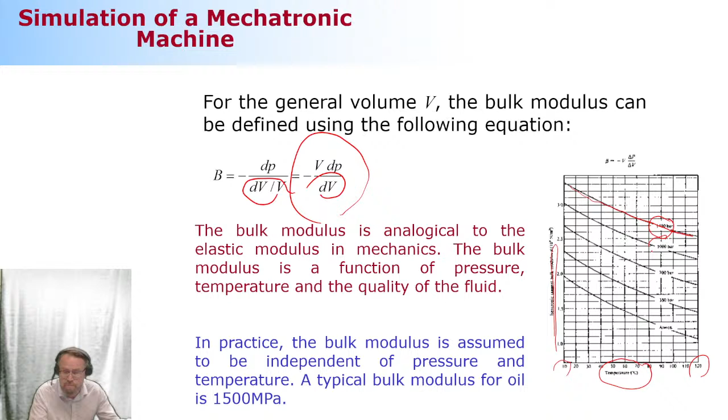Just to give you an example of how it is not constant, this picture is a little bit blurred, but I have here temperature, which ranges from 10 degrees to 120 degrees. And then I have here the bulk modulus, in megapascals. And then I have here different curves that represent the pressure within the fluid. You see that it is actually a function of the pressure. It is a function of the temperature. And this makes things complicated.

Usually, we don't care. The usual way to model the flexibility of fluid is just to set it to a constant value. And a good approximation would be roughly here, this region. Because the typical pressures we're dealing with are less than 350 bars. And the typical temperature is in this region. So the okay assumption would be 1,500 megapascals. This is a typical assumption.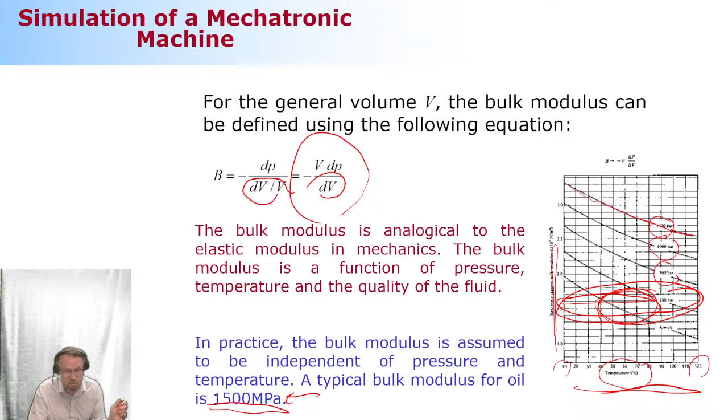You can play a little bit with this, but you'll be surprised that even if you play a little bit with this parameter, the effect on responses is not necessarily super great. There are components that are going to make a more significant effect than the compressibility of the fluid itself.

Okay, what is this effect that makes this to be more flexible? What makes hydraulics actually more flexible than the fluid compressibility itself? That, of course, is a real component. Like I mentioned, I explained this concept to you by saying that the container is rigid. But this kind of container does not exist in real life. In real life, there are hoses, which are typically made of rubber, and the rubber is very flexible, even though there is a steel net inside of it.

There is typically a certain amount of dissolved air within your hydraulics. Dissolved air. Oh my God, that's horrible, because remember, air has a bulk modulus of 1 instead of 1,500 megapascal. So if there's even a little bit of dissolved air, it increases the flexibility a lot. These different components increase the flexibility a lot, and these are the ones playing the major roles in terms of flexibility. We need to figure them out because they are making a difference in responses.

How can we make that happen? We can make that happen by combining something called effective bulk modulus. It's like a real bulk modulus, to be more clear. The one we learned in the previous slide was a theoretical bulk modulus, hard to find in real life, because in real life these factors I just explained reduce the bulk modulus, making things more flexible. The higher the value, the more rigid the fluid. The lower the value, the more flexible your actuators. Clear? Okay, just checking this is making sense.

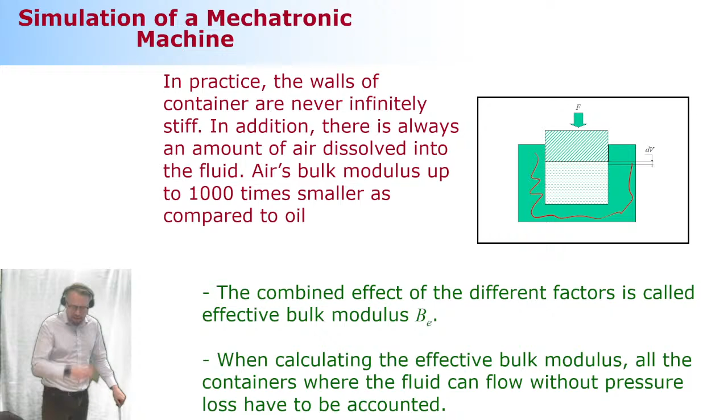All right, then how can we compute this effective bulk modulus? Let's complicate things. Let's look at a setup where instead of one container, there are two containers, where we assume that the pressure is equally distributed. This is going to be very important when we are computing the pressure. We need to discretize our hydraulic circuit into volumes where the pressure is assumed to be equally distributed. Here I think it's a fair assumption that the pressure here is the same as here, because there's nothing that introduces pressure losses, no throttles or anything like that. There's a free flow traveling back and forth between these two containers.

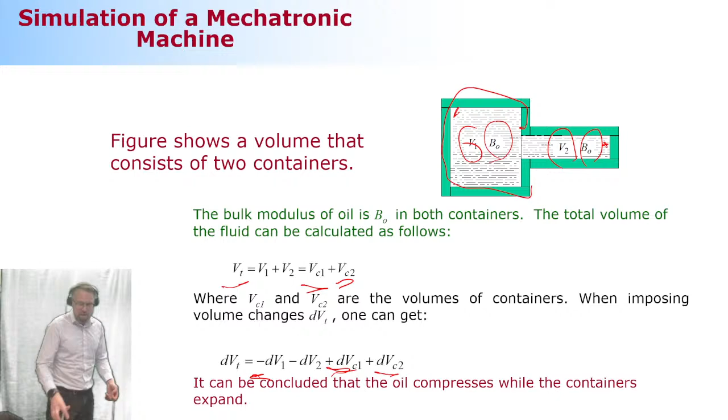So here is my first container, of size V1, and the second container is V2. And the fluid bulk modulus is assumed to be the same, because the same fluid travels back and forth. So here, this is B1, B0, B0. Let's look at the total volume. The total is container 1 plus container 2, simple like that. Now let's change the volume of the fluid. That means the containers are also getting a little bit bigger, because they are expanding a little bit. Using the definition of bulk modulus written down here, and substituting that information here, so on and so forth, this is how it's going to be written.

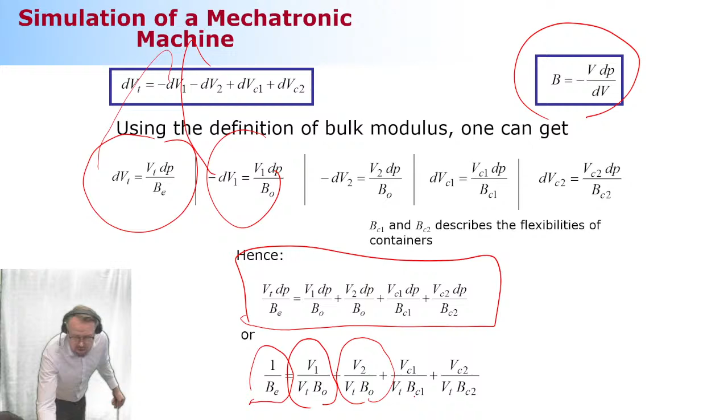And now if we solve this, that is called effective bulk modulus, it's going to be based on the flexibility of the fluid itself, and the flexibility of the first and second containers. Then, once we assume that the container size is roughly the same as the volume size, we can simplify this as shown here. Okay, let's stop here. This is what you need to compute. This is called effective bulk modulus. This is what we are after.

In this particular case, it's based on 3 components. The first component is the flexibility of the fluid itself, which we can set to be 1,500 megapascal. Then we have the flexibility of the first container. How much is that? This is what we need to compute separately, with respect to the size of the container itself. Then the flexibility of the second container and the corresponding volume size.

Now, if you're dealing with steel hydraulic cylinders, their flexibility is actually not very big. But as I mentioned, the hoses introduce quite a bit of extra flexibility to the system. And of course, one component not yet accounted for here is the dissolved air. That should be added to this equation, the same way. You need to make an assumption about the volume occupied by air, and the bulk modulus of air is going to be extremely low.

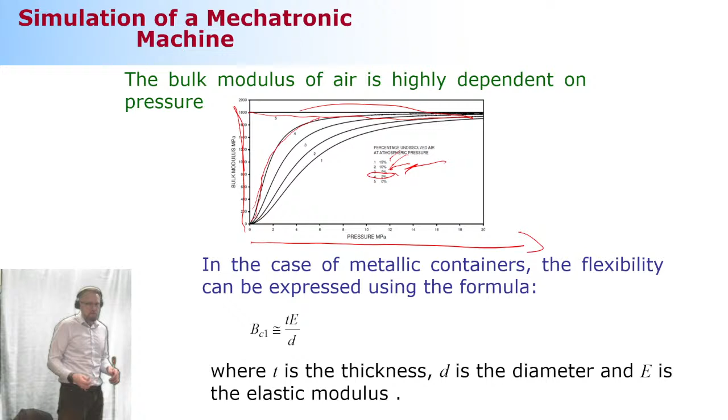Okay, so this shows how much the containers are introducing flexibility.

Here's my last slide, because I see you guys are tired. Why is it? Is it because of a rough week? It's Monday, how can it be a rough week already? Because you enjoyed not having any lectures and now you're having a hard time coming back, or what's up, what's the deal? No need to answer. Okay, here's the last slide for today. So you have hope, you will survive, so be with me, it's going to be fine.

Okay, last slide. This is an experiment about what happens if there's a hose, and how the effective bulk modulus behaves in that case. You see this is heavily a function of pressure inside. Look at the numbers here, this is at 10 to the power 1, so this particular value is actually 400 megapascal. Compare that to the flexibility of fluid alone, which was 1,500 megapascal, and you see it's reducing a lot.

Now what do we learn from this? If you have a problem with the flexibility of a hydraulic cylinder, go and reduce the length of the hoses. This is the first thing you can do. Make the hoses shorter than originally. Replace the hoses with pipes, because pipes are much stiffer than hoses. But if there's no other way, then you just need to deal with this lower flexibility.

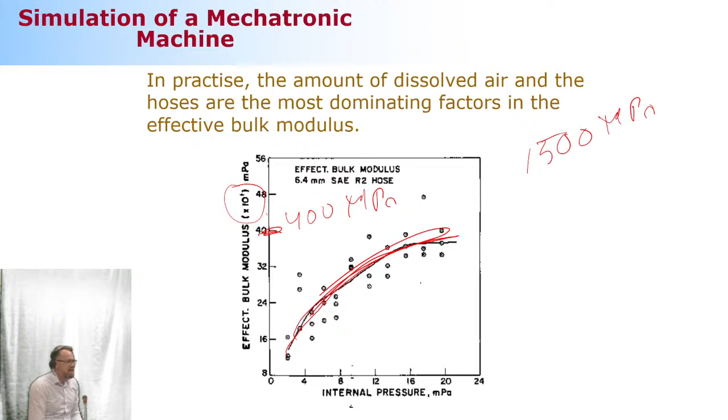And again, lower flexibility isn't necessarily about the fluid. Yes, that plays a certain role, but the more important role comes from the hoses and other components. So try to reduce that as much as you can, and then you have more rigid hydraulics. What's the benefit of more rigid hydraulics? Well, it depends what you want it to do, but at least you get rid of this annoying flexibility where sometimes you need to wait until it's damped down. And it feels better because it's more solid.

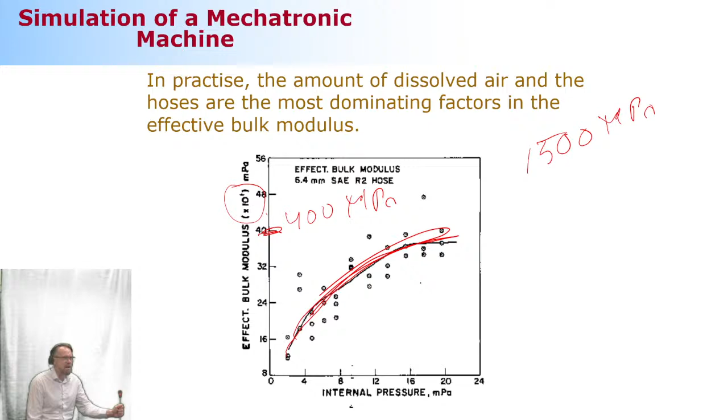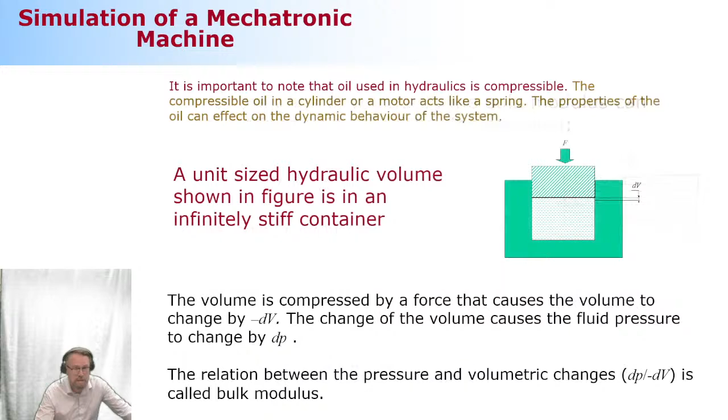Okay, so this is the opening session about hydraulics. We'll continue with hydraulics next week. We're going to discuss viscosity, which is not very important for us, and then we're going to discuss something very, very important called lumped fluid theory. All modeling of hydraulics is going to be based on lumped fluid theory. It's a concept that isn't overly complicated, but you do need to follow my explanation.